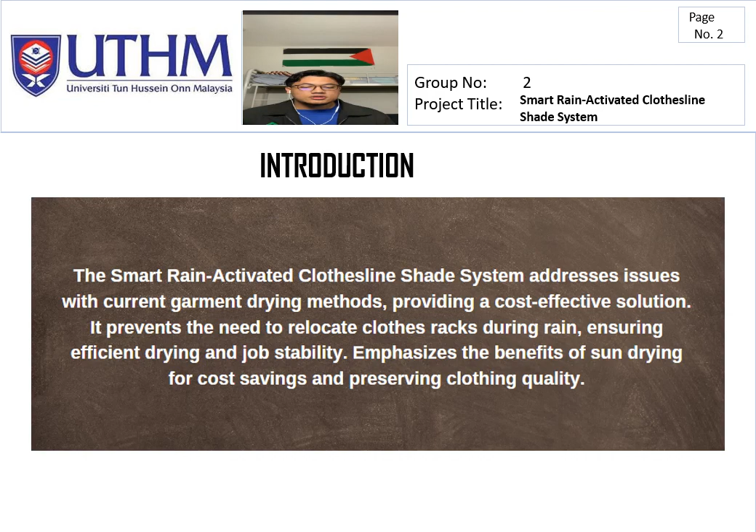So we go to the first slide, which tells about the introduction of this project. The Smart Rain Activated Clothesline Shade System addresses issues with current garment drying methods, providing a cost-effective solution. It prevents the need to relocate clothes racks during rain, ensuring efficient drying and job stability, and emphasizes the benefits of sun drying for cost saving and preserving clothing quality.

The next slide tells about our problem statement, which has two parts: general and individual. In general, rain hampers drying, causing dampness and odor in garments, delaying wear, and affecting dry cleaning pickups. For the individual, clothes left out all night will become cold because of the mist.

Climate change will be even more crucial, especially when it comes to rainy seasons. The third problem statement is that carbon dioxide emission and electricity consumption are high in dryer machines. And the last one is it's difficult to move the clothes rack from one place to another when it's raining.

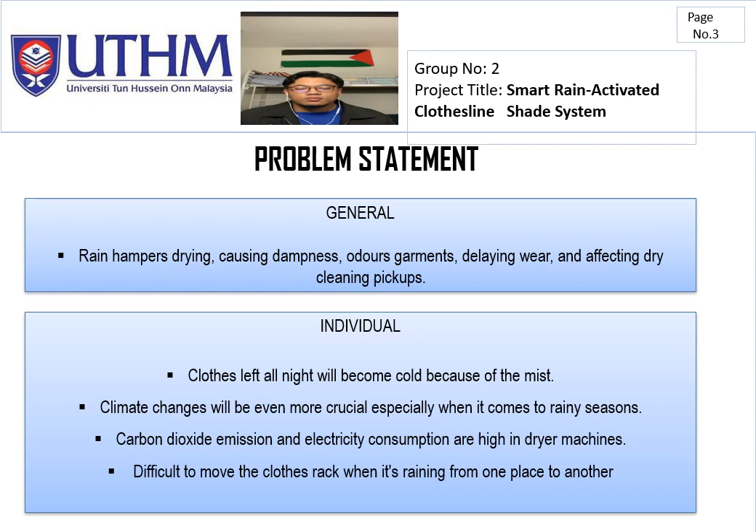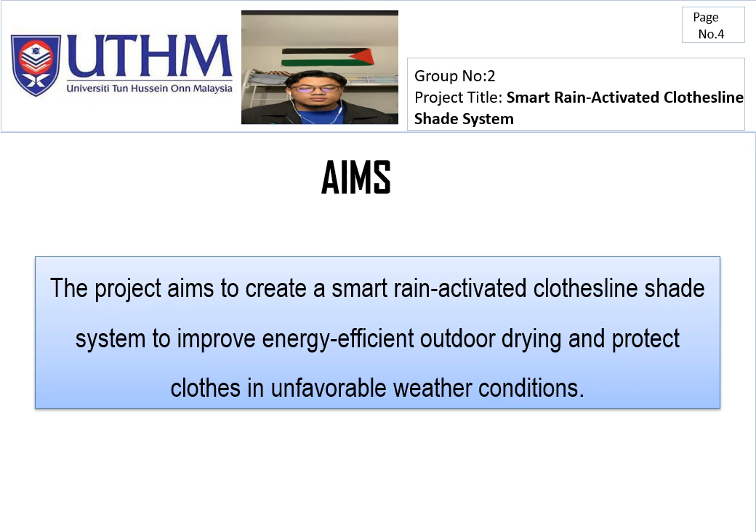The next slide tells about our aims. Our aim for this project is to create a smart rain activated clothesline shade system to improve energy efficient outdoor drying and protect clothes in unfavorable weather conditions. Next, the description of this project: the final project is the Smart Rain Activated Clothesline Shade System.

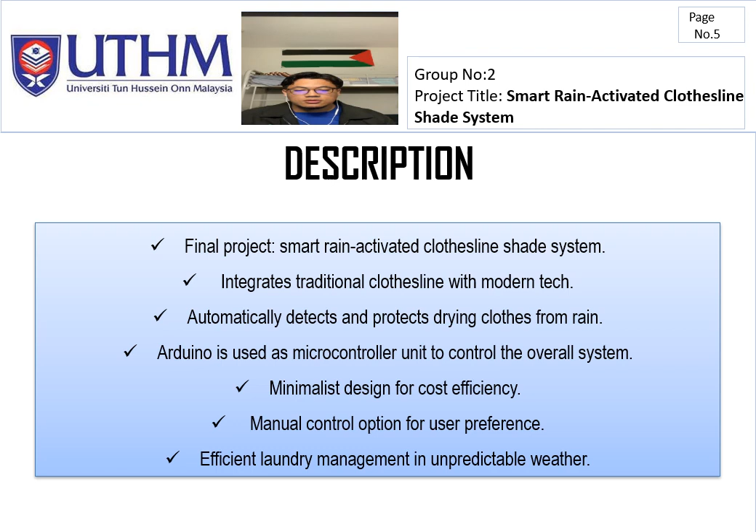We integrate a traditional clothesline with modern tech. It automatically detects and protects drying clothes from rain. An Arduino is used as the microcontroller unit to control the overall system. It has a minimalist design for cost efficiency, a manual control option for user preference, and lastly, it offers efficient laundry management in unpredictable weather.

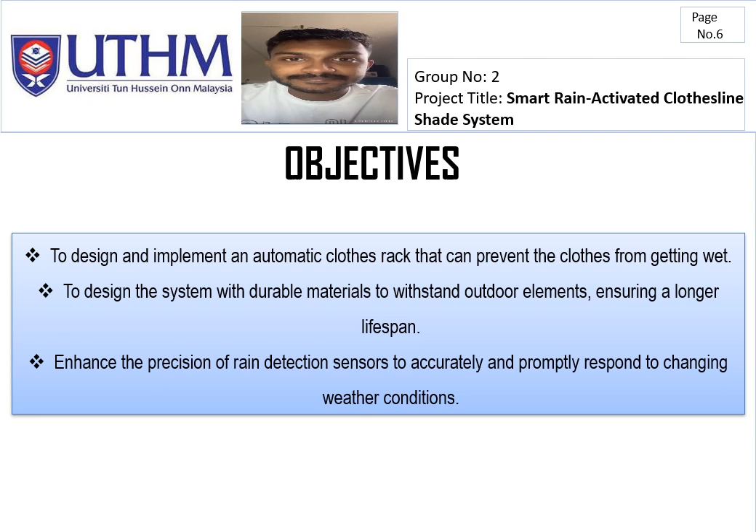So moving to the second slide, which is the scopes. In total we have four different types of scopes.

The first one is the mechanical scope, for example the roller blind, so we have to retrieve the sheets. This is electronic components working together with the mechanical component, which is the roller blind, to make sure the process works well. For example, if rainfall is detected, the roller blind will move forward to close. If the rainfall has stopped and it's now a sunny day, the roller blind will retrieve inside to open and resume the process. So the second scope is we must make sure the roller blind really rotates 360 degrees without any problem, according to the time set. For example, for 10 seconds, the roller blind must move for 10 seconds until it closes fully.

The third scope is we can use all types of clothes for this product, no matter what. The last one is it is limited to 8 kilos of wet clothes, so it cannot be more, it can be less, but you must set it to 8 kilos because it will help the effectiveness. So these are the scopes, and that's all from me. Thank you.

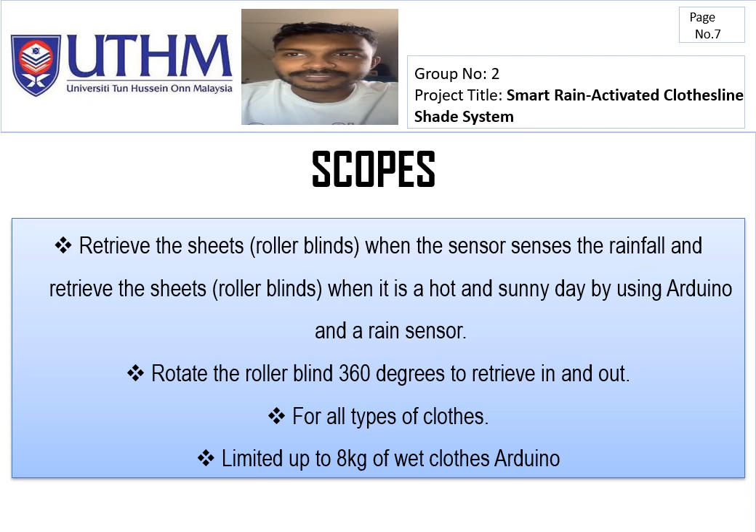My name is Muhammad Izzuddin bin Hassan, with matric number CN210212. For this layout design project, there are 3 roller blinds, which are on the top, left and right.

At the back, there is also a box protection component, and a place to hang cloth is under the top shutter.

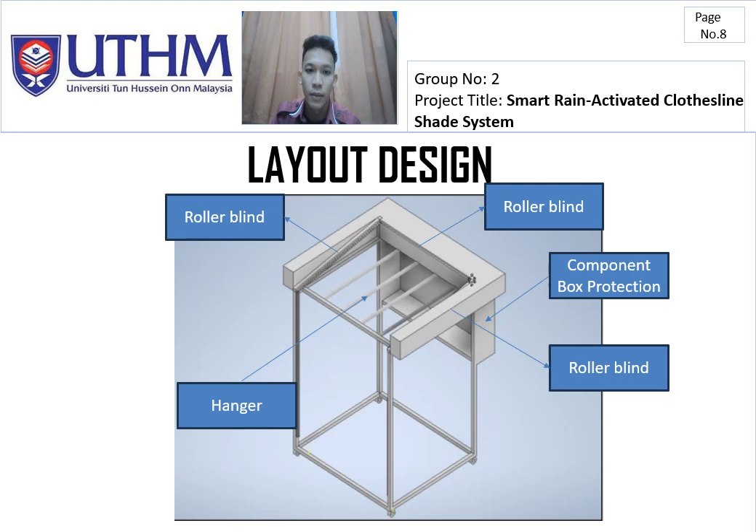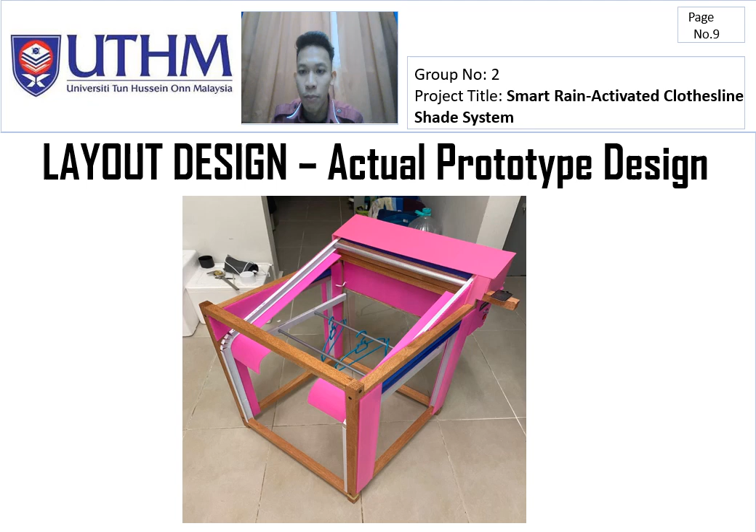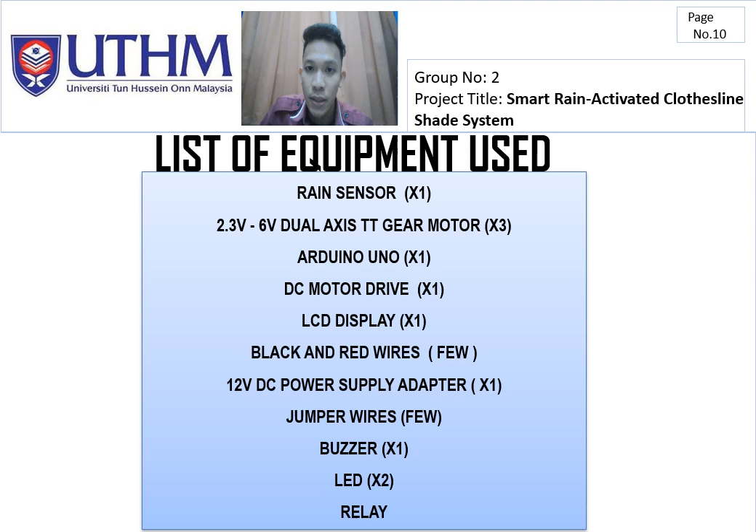Next is the list of equipment that we use in this project. First we use one rain sensor, a 2.3 to 6 volt dual axis TT gear motor, one Arduino Uno, one DC motor driver, one LCD display, a few black and red wire jumpers, one 12 volt DC power supply adapter, a few jumper wires, one buzzer, two LEDs, and one relay.

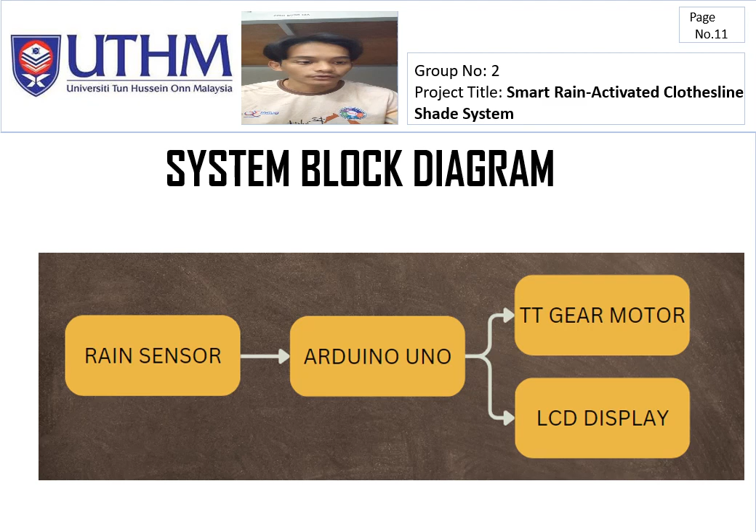And for the TT motor, it is the DC motor, a crucial component that drives the mechanism for deploying and retracting the shade of the clothesline. Lastly, the LCD is what we use to display the condition after the rain sensor detects rain, whether it is raining or not raining.

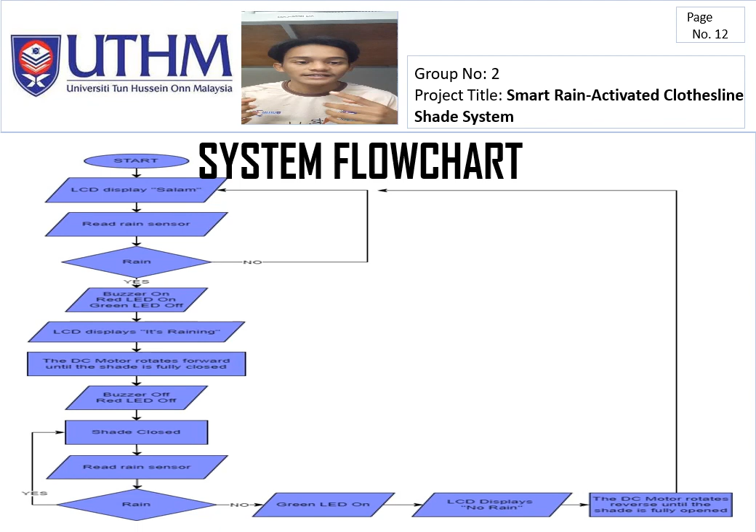But if the condition changes, which is no rain, the green LED will be on, and the LCD is going to display no rain, and the DC motor will rotate reverse until the shade is fully open. After the shade is fully open, it will go back to its initial state, where the LCD will print salam.

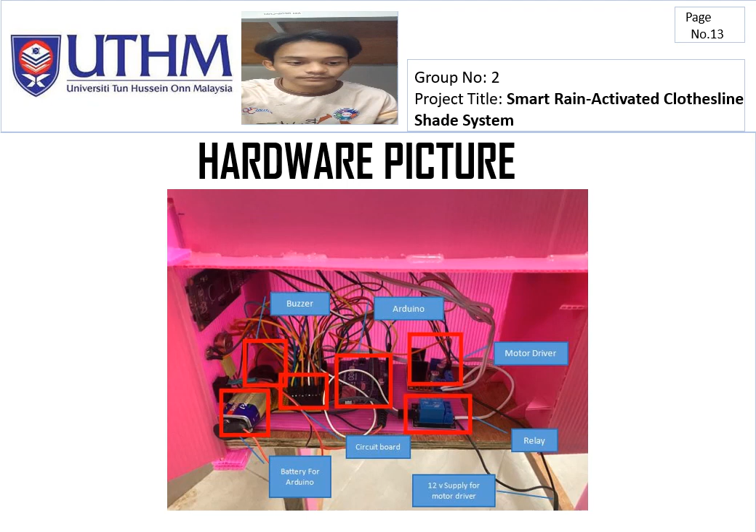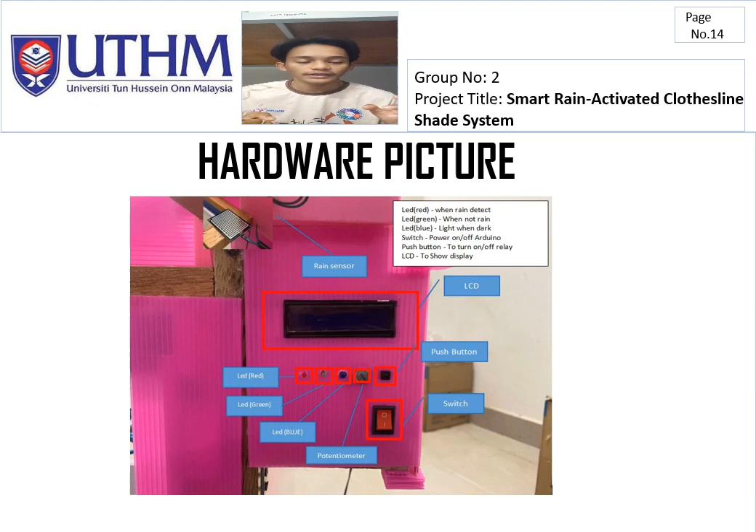This circuit design, we soldered before we put it onto the cardboard at the back of the shed. And this is the picture when we look from the outside of the shed. As we can see, there are LCD, push button, the potentiometer that controls the LED, the blue LED, and after that the green and red LED, and switch on button. And if you could see at the other side, there is the rain sensor that will detect the rain.

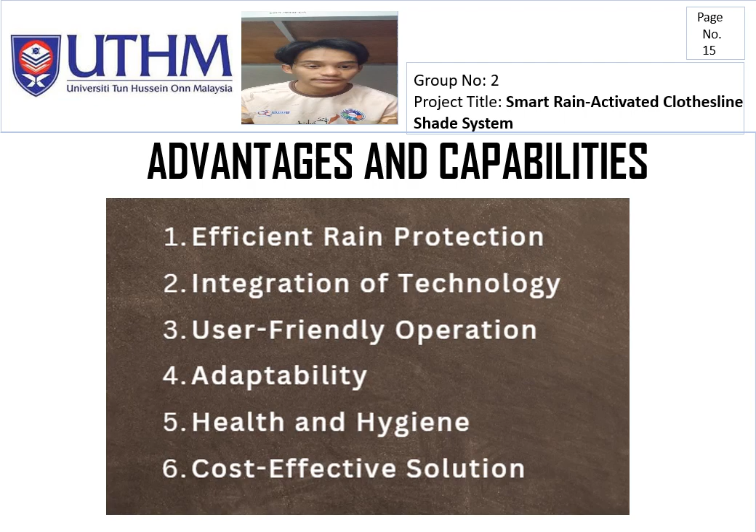And for the last, cost-effective solution. While the initial investment in a smart automated clothesline shade system may be incurred, it can be considered a cost-effective solution in the long run. By preventing clothes from getting wet, the system reduces the frequency of rewashing or replacing damaged clothes, saving on water, detergent, and clothing expenses over time.

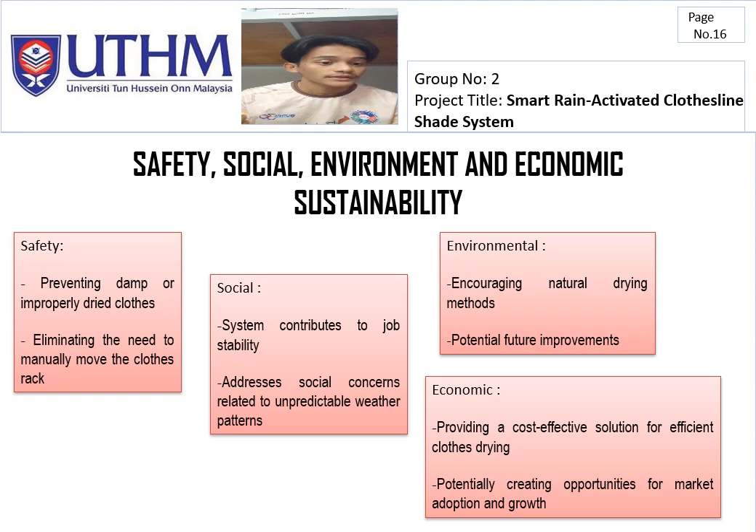After that, creating opportunities for market adoption and growth. The adoption of the smart rain activated clothesline shade system can create opportunities for market growth. As awareness of the system's benefits increases, there is potential for growth in the industry, creating jobs and economic opportunities in manufacturing, installation, and maintenance of this system.

Assalamualaikum. I will explain about the test result at slide 17.

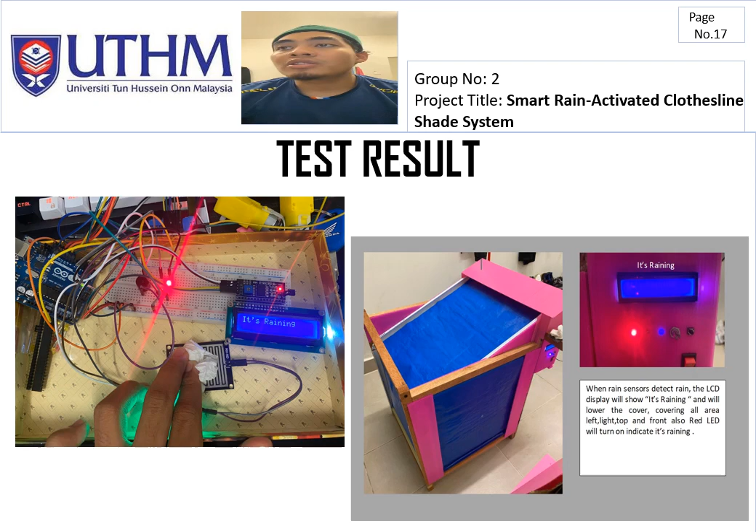Beside that, this is a photo of the final product. The description is when the rain sensor detects rain, the LCD will show it's raining and will lower the covering over the area.

Next, this is a test result table. The reading is recorded by the digital signal value of the moisture detected. You can see this table.

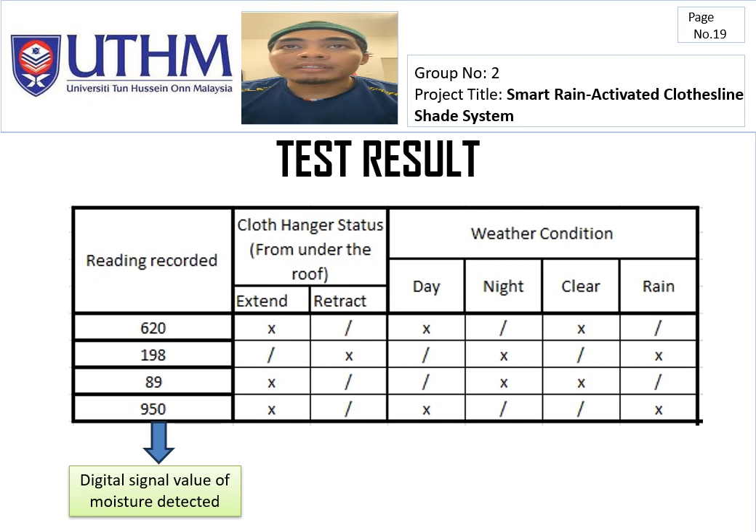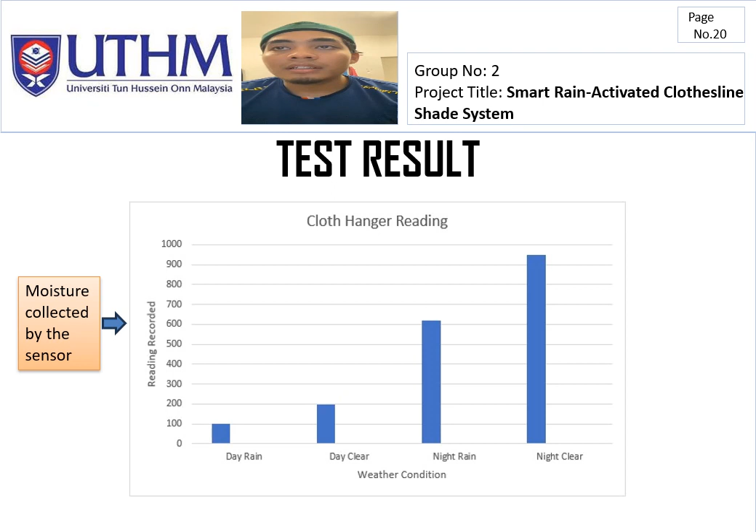Also the same table, but this time it's the graph. You can see the moisture collected by the sensor for day rain, day clear, night rain, and night clear.

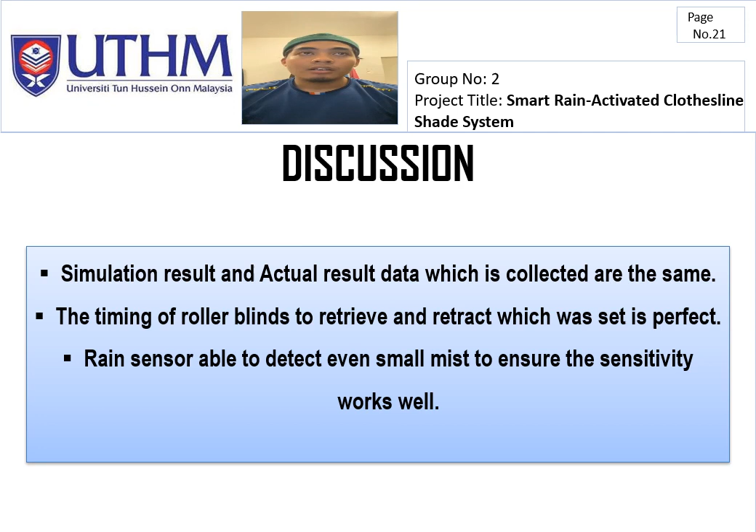Discussion: the simulation result and actual result data collected are the same. The timing of the roller blind to retrieve and retract, which is set, is perfect. The rain sensor is able to detect even small mist, ensuring the sensitivity works well, meaning we can set the sensor sensitivity from the potentiometer at the rain sensor.

For future improvement, first, a water collecting system able to collect rainwater so it won't be wasted. Second, affordability improvement: use components that are not so expensive.

Lastly, enhanced sensor technology. This might use a nano sensor or nanotechnology on the sensor, which will improve the effectiveness and layout design of the project.

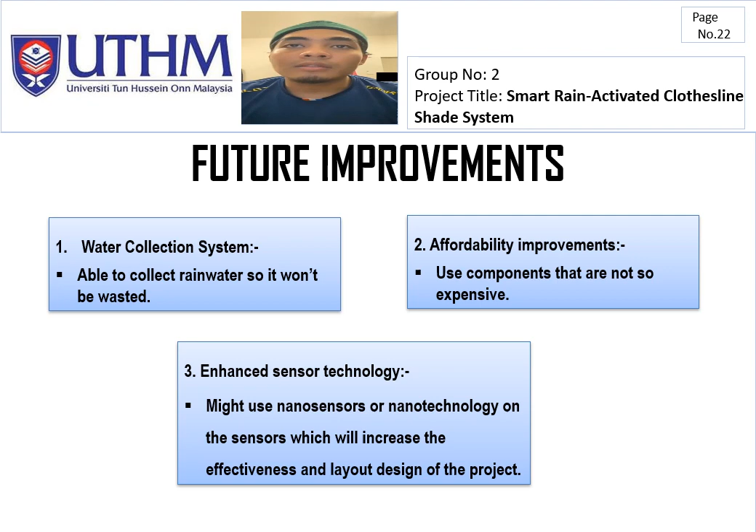For the conclusion, the smart rain activated clothesline shade system is a groundbreaking innovation in outdoor clotheslines, seamlessly incorporating technology, particularly Arduino and rain sensors. Its automated shade deployment and retraction not only improve user convenience but also enhance safety in unpredictable weather conditions. Going beyond its primary purpose, the project holds social importance by addressing job stability concerns.

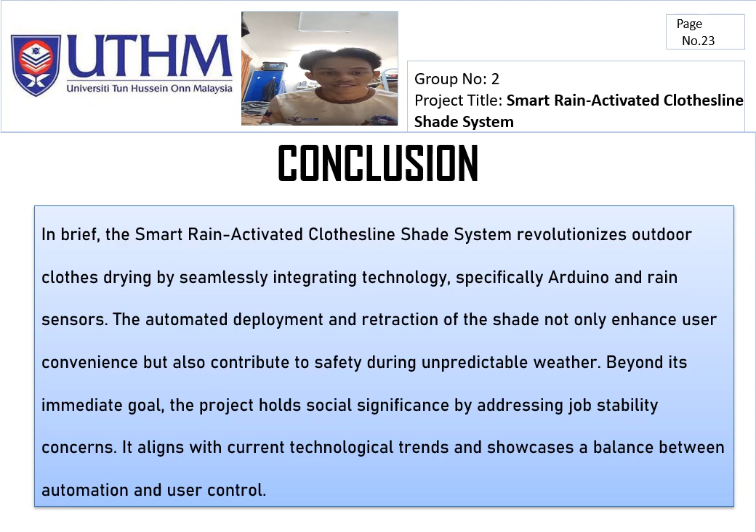It aligns with contemporary technological trends that demonstrate a harmonious balance between automation and user control.